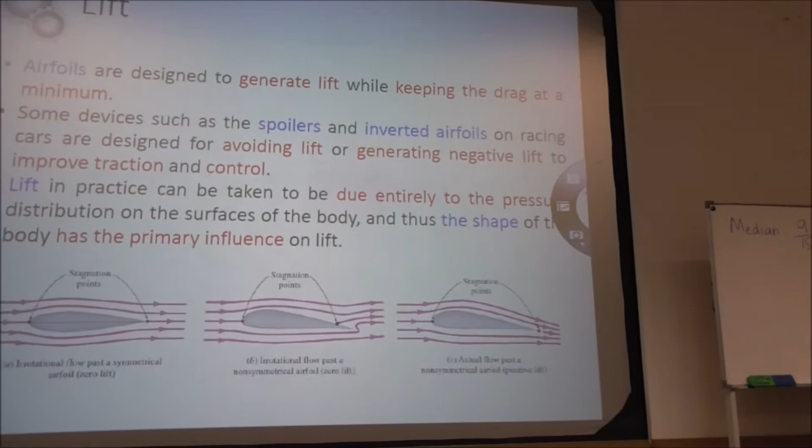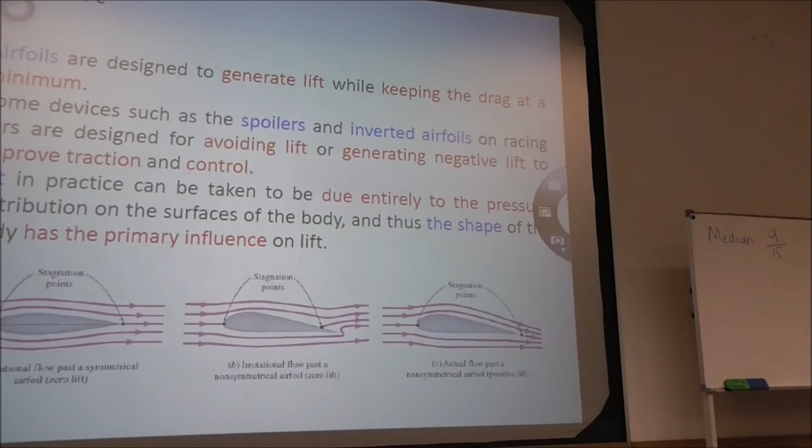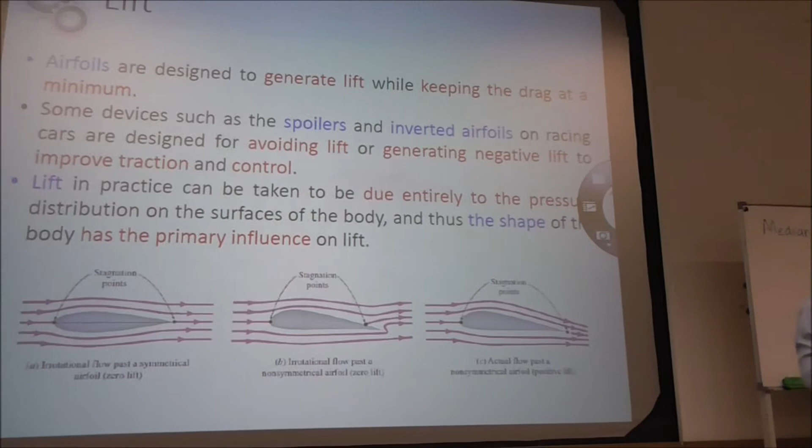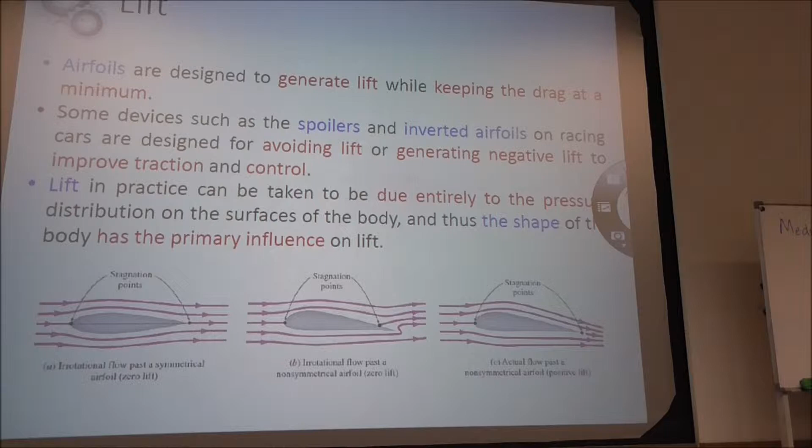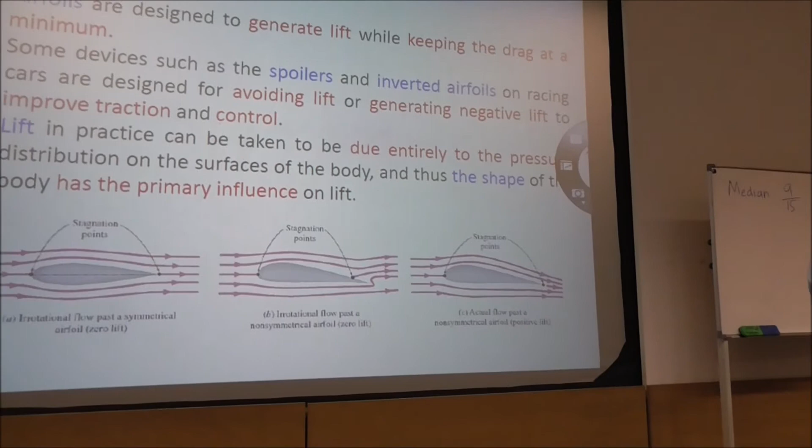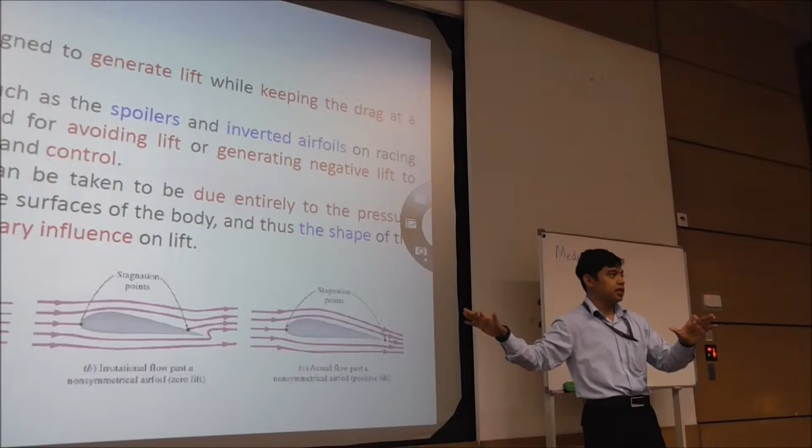It is not like your... sometimes you want to modify your old Saga into a new Saga, so you buy a fiber, right? You buy a fiber, you put it there. But of course, those fiber will not be the same as the fiber used by the Bugatti or Ferrari. Right? Most of those cars now are made of fiber. That's why if you see any accident involving Ferrari, it will burst. When it bursts, burns, you will see nothing. Right? Nothing, because it's made of plastic. But of course it is very expensive plastic, not the plastic that you have for your bottle or for your watch. It's totally different.

Okay, nowadays the same goes for the aircraft. If you know the A350 and Boeing 787 and the newest Boeing 777X, they are all made of polymer, because polymer has a very good strength, right? If you look at the history, humans used to wear nothing when they go for war, right? They just go there using axe or sword, right? And then you just do like that, like a knife. But then after some time, they try to wear a heavy metal plate, right? Over the day, it's getting heavier and heavier. Then they cannot hold it anymore.

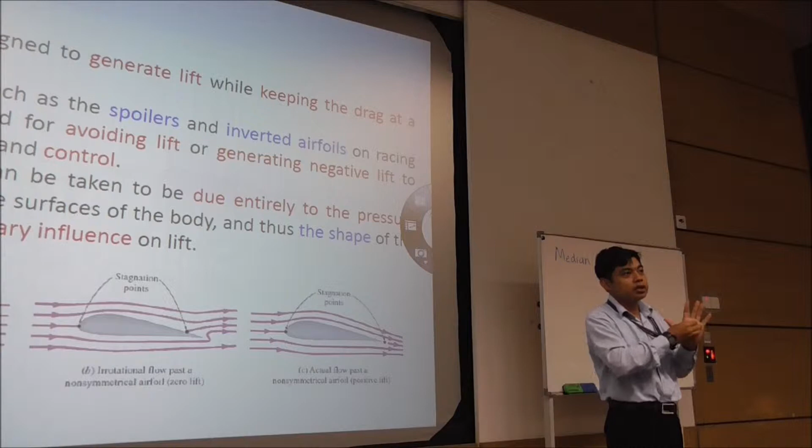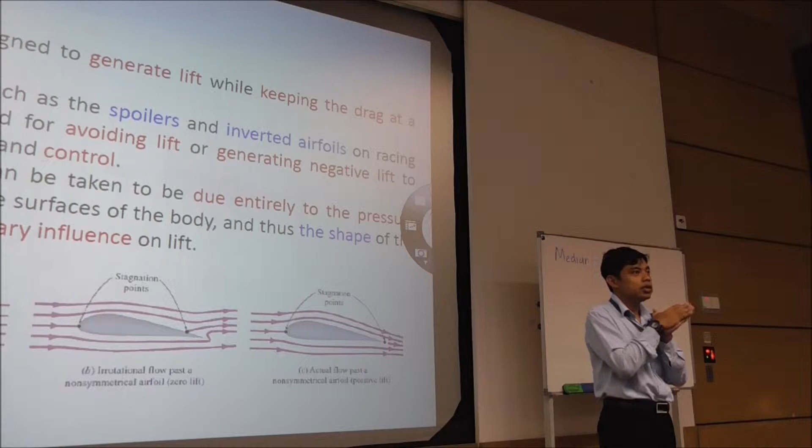Now, if you know, the modern soldiers, they are using Kevlar, right? Kevlar is very thin. It's like this thin, but it is made from the polymer, and it's very proof. Like bullet resistant. So even if you hit those Kevlar, it will not be ruptured. So it can hold that thing. And it's made not from metal, it is made of polymer. So with the same concept, now the airplane manufacturers want to utilize this polymer. It is very strong, but at the same time it is very light. Okay, that's why they want to use it. So you need to control the surface of those. Okay.

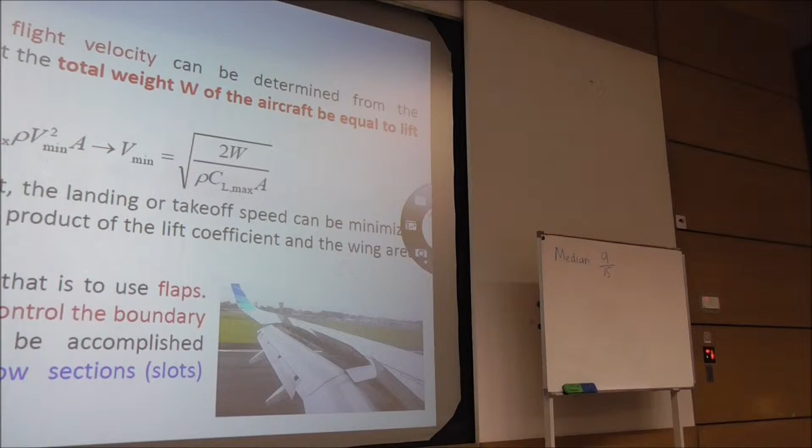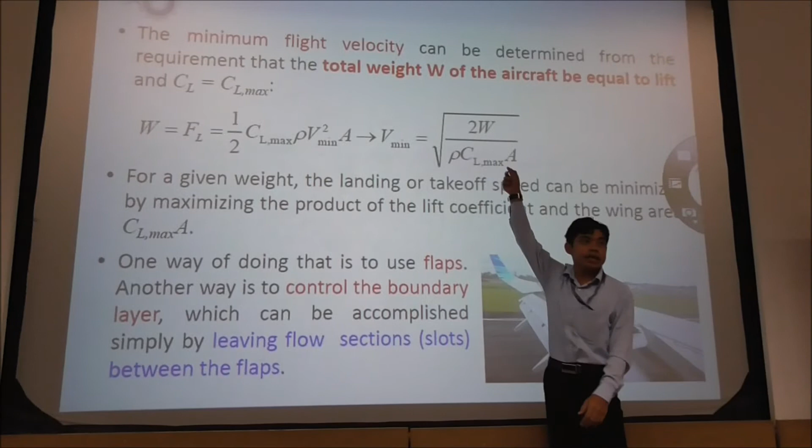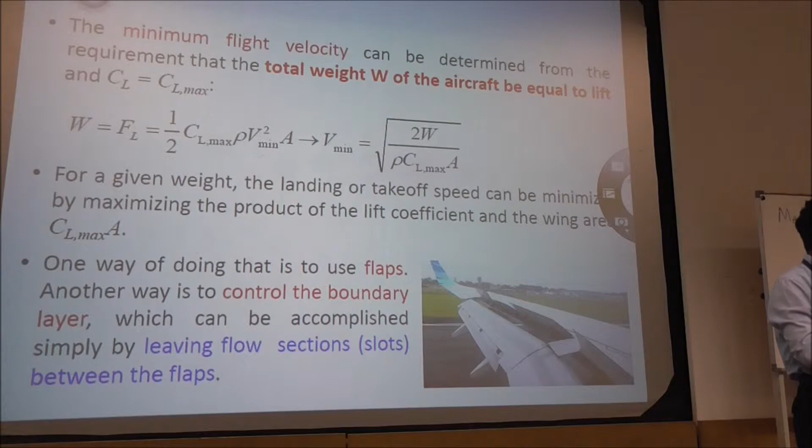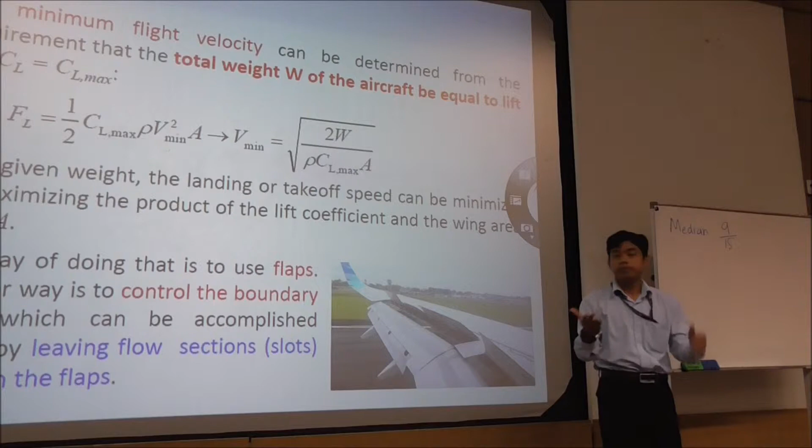So the trend now is the wing getting longer and longer. Right? The reason is now you want to maximize the area. Okay, the Boeing 777X that you will see in the next 2 years will have a folding wing, just like your Super Hornet F-18 or F-14 that can fold. And just like your origami, you fold the wing, put it in your pocket. This aircraft now uses the same concept. So this wing can be folded. When it's not needed, it will be folded. When it is needed, it will be like that.

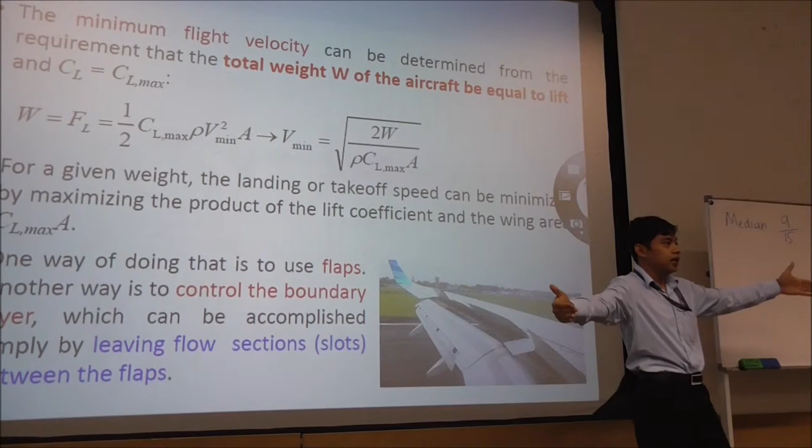The reason for that is because they do not want to expand again the already very wide runway. Because overall, this runway can have a width of 60 meters. So you do not want to make it even bigger. So how to do that? You make it foldable. When you need it, it will be utilized. When you do not need it, fold it. That's it. So make it simpler. Okay.

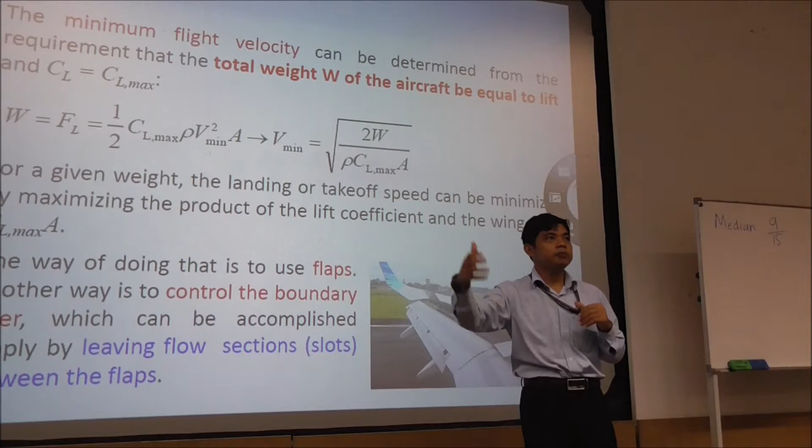So we already know that during the takeoff, we want the takeoff speed to be as minimum as possible. Because if you need the higher speed, right, you need a longer runway, and longer runway means more expensive. Because not only you need to build the runway, you need to buy the land, you need to clear up everything, right? And also, if you realize, near the airport there will be no high-rise building, right? Because it is a rule.

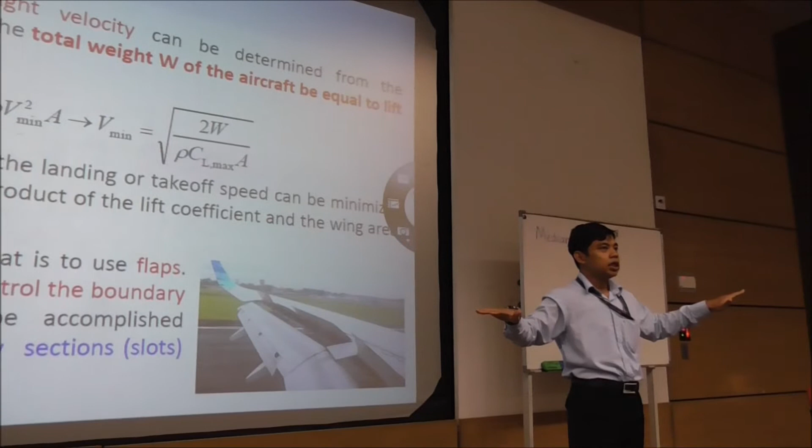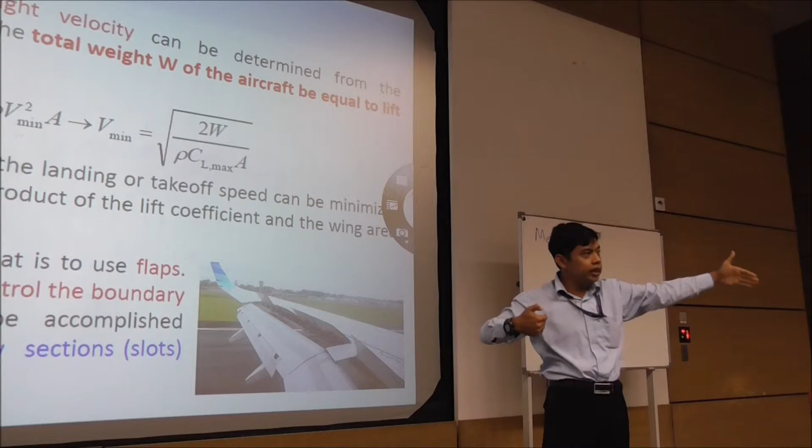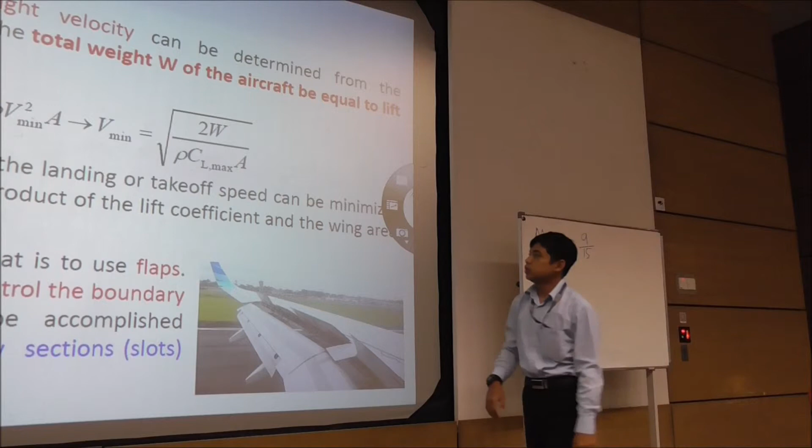If not, something like in Medan will happen. You know, the Hercules goes there and then one building there slices it, just like slicing a cake. But rather than the cake that is sliced, this one is the aircraft that is sliced. Because this thing is very hard. Okay, so you see that it is not only about the runway, but also the area outside the runway. So if you need to make it faster in the takeoff, you need a longer runway. If you need a longer runway, of course, the area affected by the runway will be bigger. So if you want to make the minimum takeoff, then the only way is to play around with this CL and area.

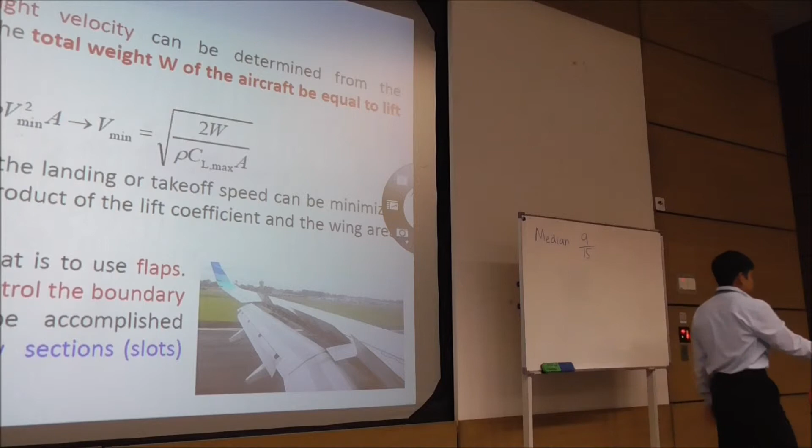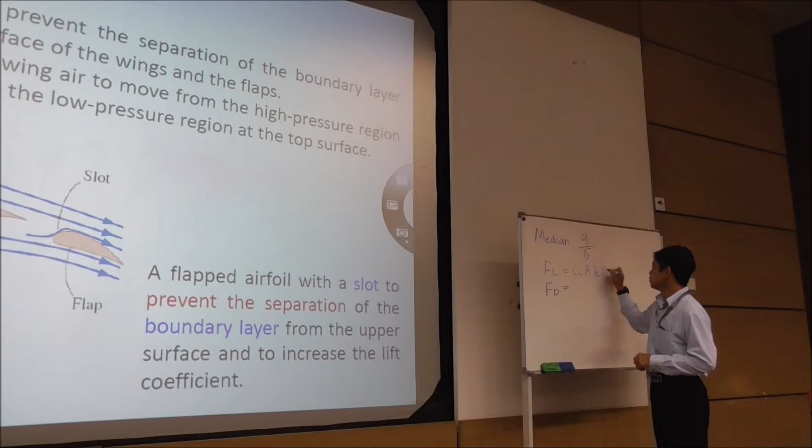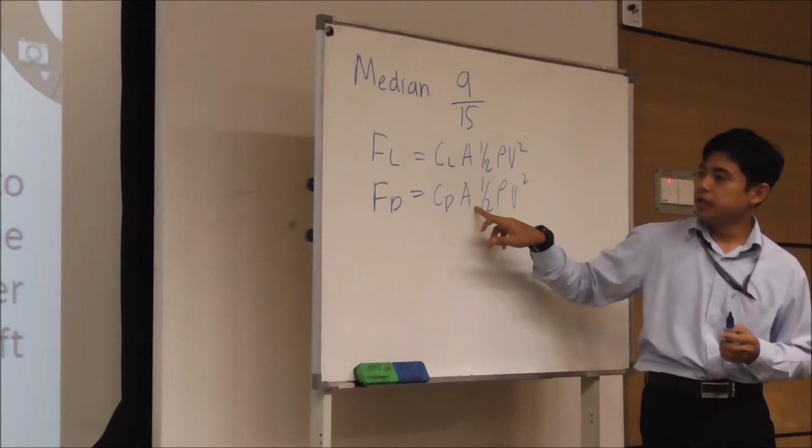Okay, and the area, if you want to increase it, you need to remember that when you increase the area or get a higher lift, you will increase the drag force. So whenever you play around with FL, you will get the FD, right? Because this one is CL, A. This one is CD, A. Okay. So if you increase the area, you will increase the FD. So you do not want it. You want it to be minimum also. That's why you introduce the so-called flap.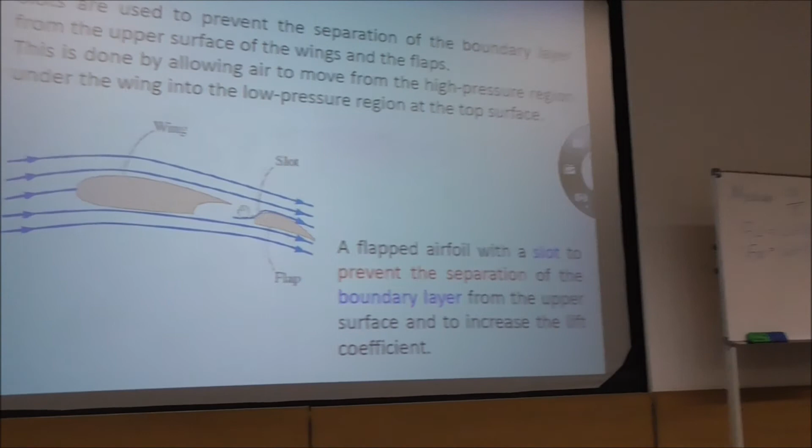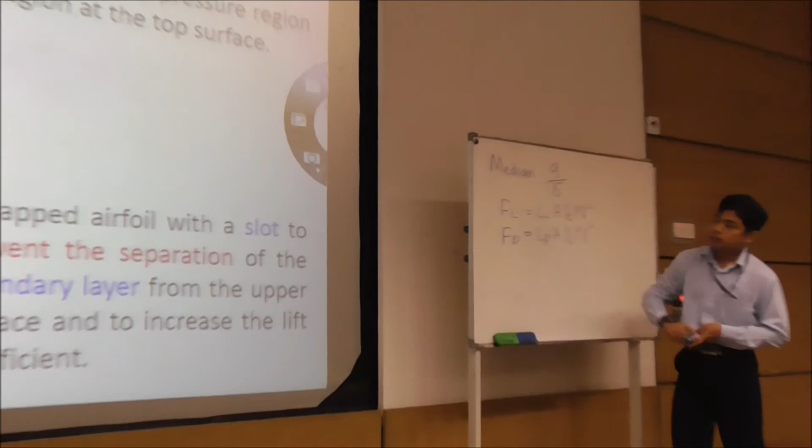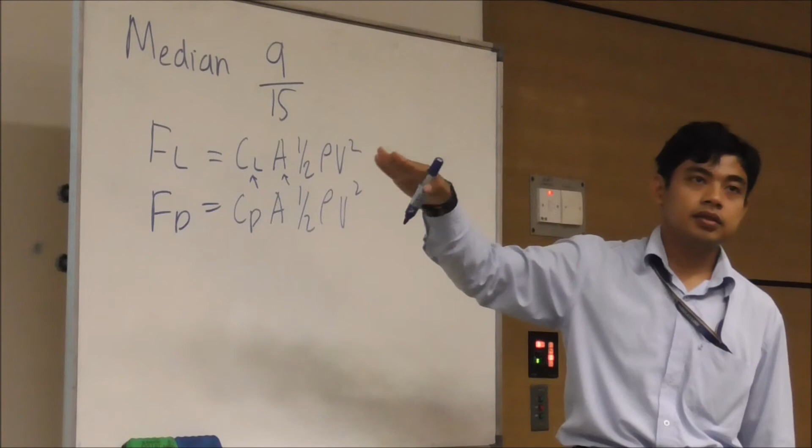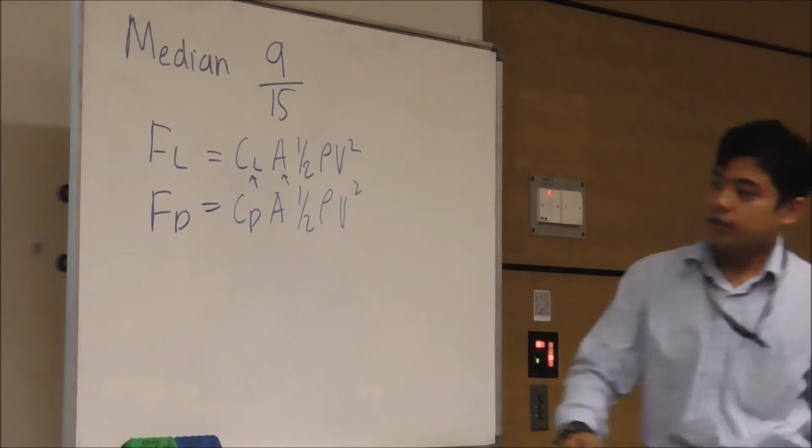Okay, this flap is there to help you extend the area. But at the same time, when you don't need it, you will reduce it. But this increase in the area will not be counted in here, but rather it will be counted in the CL. It will not be counted in the area because the area is the area of the wing when the flap is retracted, not utilized. Okay? And then you will see that between the flap and the main body, there is a slot.

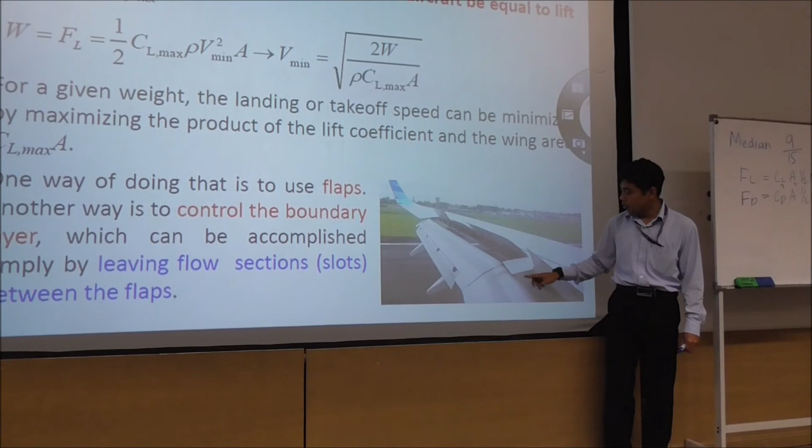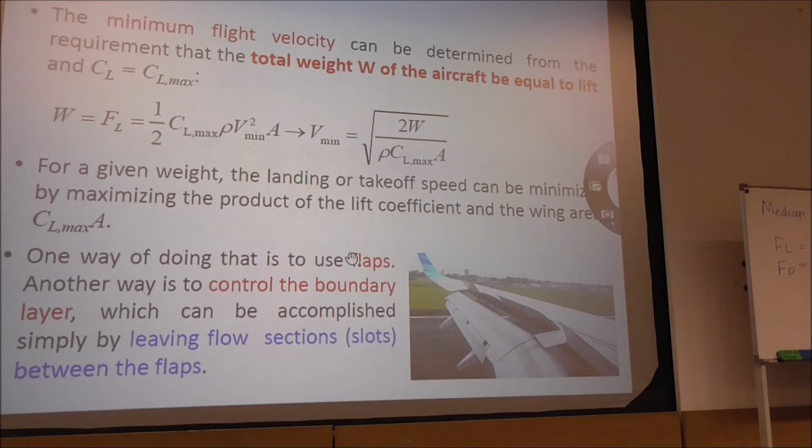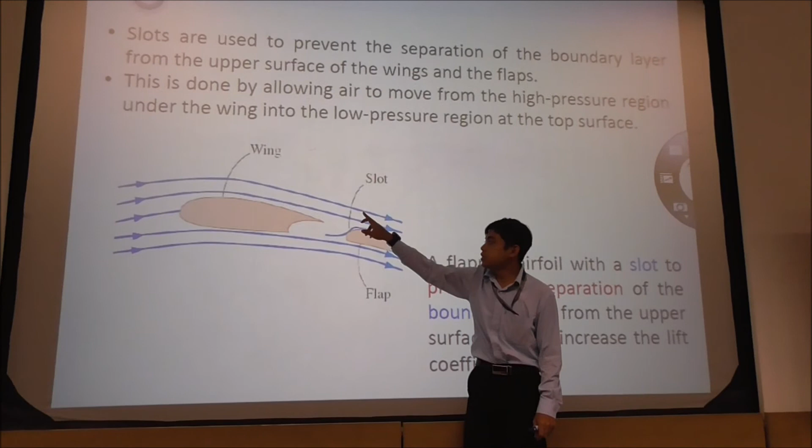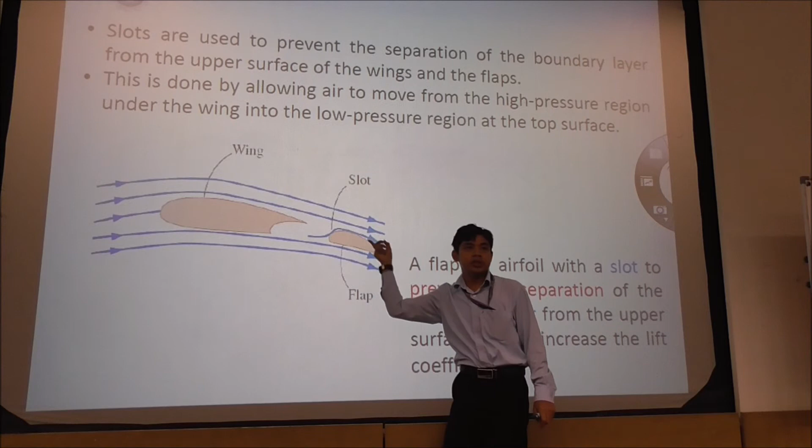The reason for this slot is to get the lower velocity air from down there to go up. The reason for that is you will get a reattachment of your boundary layer, rather than it detaching, because when it is detached, you will get a separation point. When you start to have a separation point, the wake region will be bigger. You do not want it. Right? You want the separation point to be as late as possible. So you disperse a little bit of air there, it will attach here, so there is no separation region. Okay, so the slot there is to give you that. Sometimes there is a slot over here also to help that.

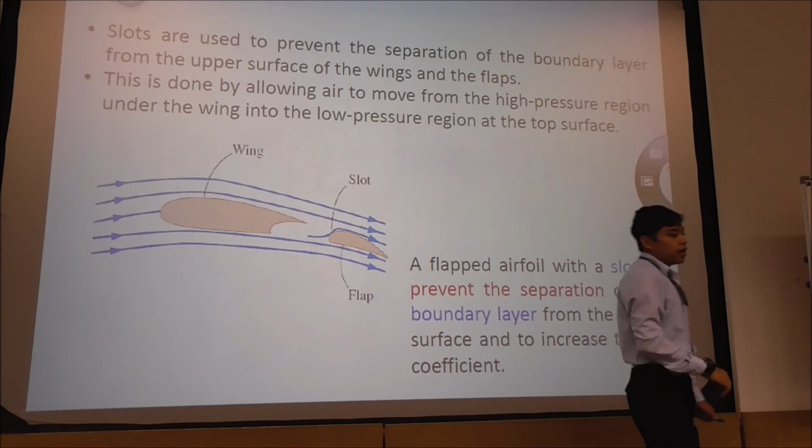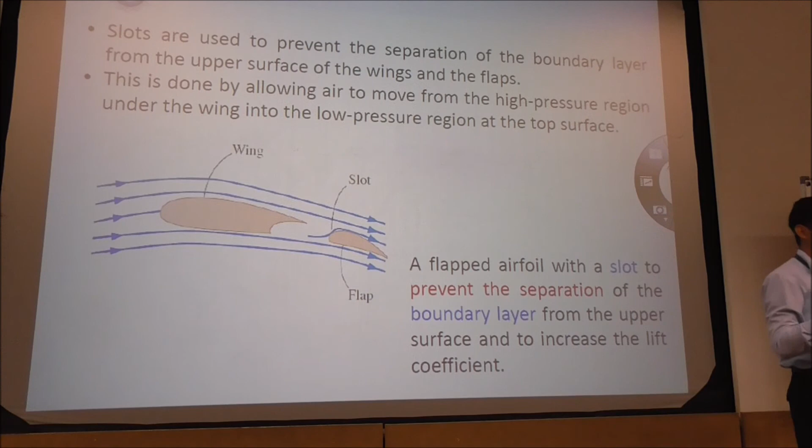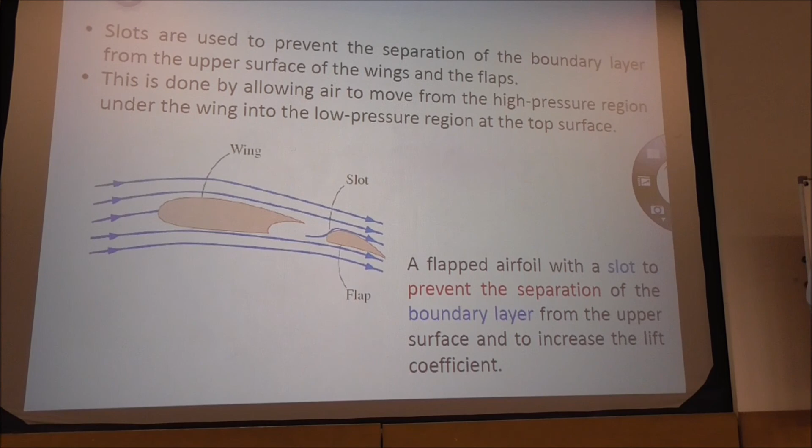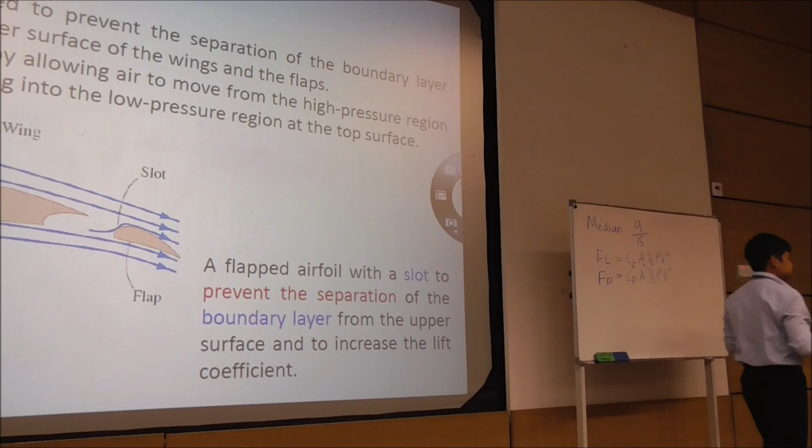Okay, and if you see, the aircraft wing is not smooth, it has grooves. Right? There are some grooves. The reason for that groove is, if you remember, when we were dealing with the golf ball, you want it to be in a turbulent region for that particular speed. The reason is because if you get into that region at that particular speed, you know it will have a decrease in the CD. So all those things in the aircraft are not arbitrary. They are there because of those purposes. Okay.